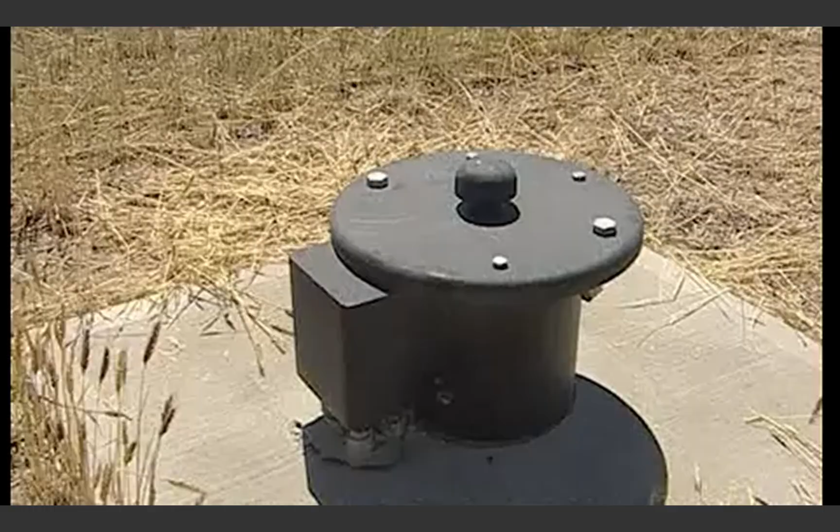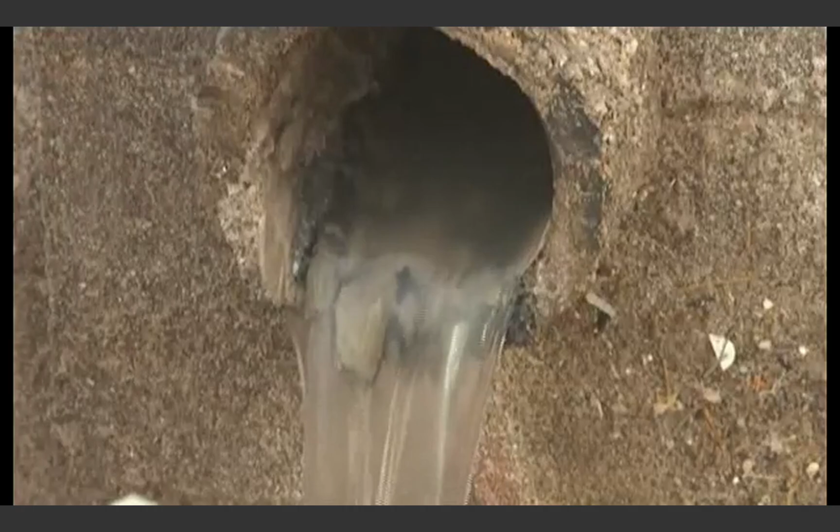Water. Water comes in many forms. Groundwater, surface water, drinking water, wastewater, stormwater, or dual use and reuse. Some may need greater treatment than others, depending where it is discharged or on how it is used. In the end, however, it is all water.

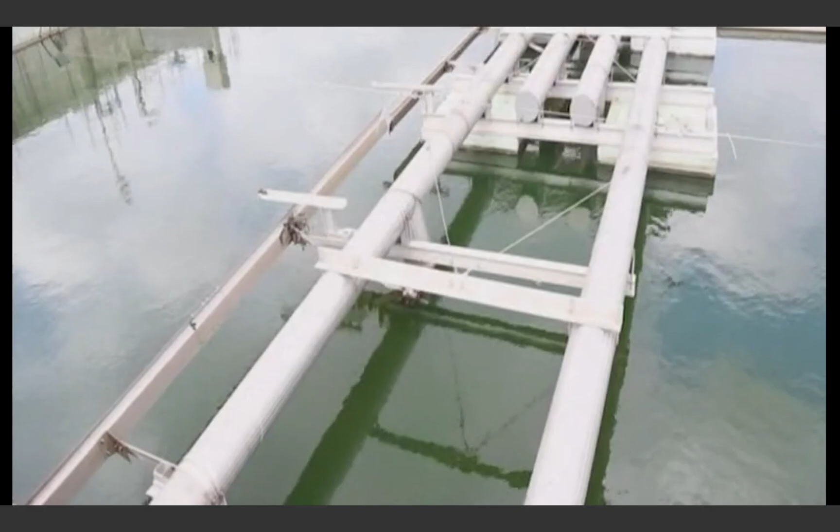This program is meant to be a general wastewater overview that will examine secondary treatment. Understand that no two treatment plants are identical, and that while there are variations between treatment methodologies and plant designs, usually because of the region or climate, the science and concepts remain the same.

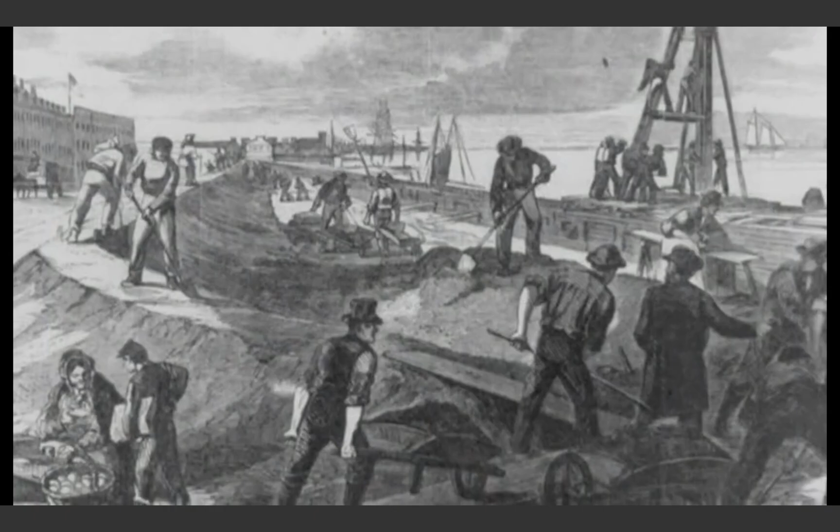It was not until the late 19th century that the beginnings of sewerage, infrastructure designed to convey sewage, was implemented in North America. Outbreaks of cholera, typhoid, and other waterborne diseases during these early years challenged scientists. The research of Louis Pasteur and Robert Koch provided the scientific proof for germ theory and the presence of waterborne disease. The knowledge of the impact of harmful organisms contained in sewage illuminated how inadequate disposal could harm human health.

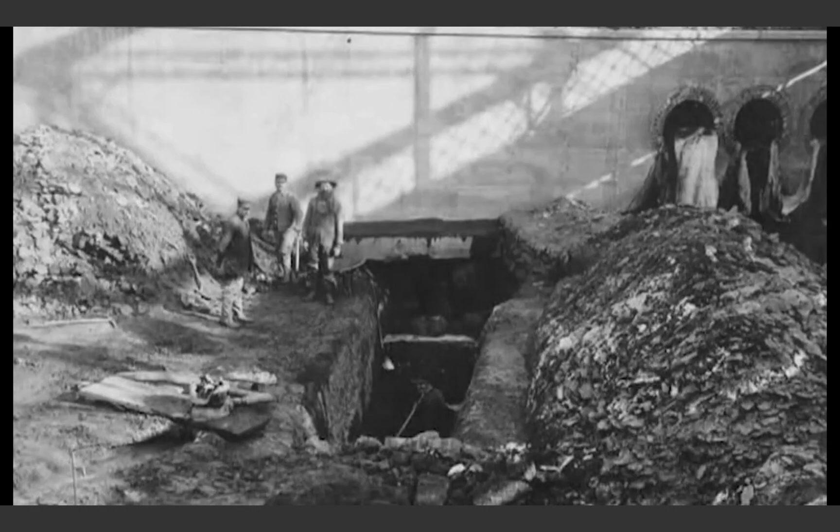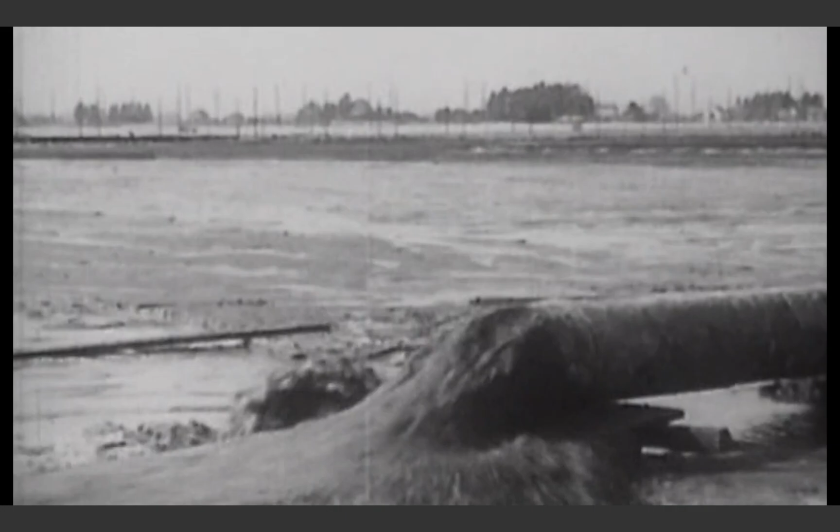Cities rallied to build collection systems to carry waste away, usually to the closest waterway. Policymakers and city engineers of the time believed that the flowing waters would purify the sewage. In 1899, the Rivers and Harbors Act was passed, but it would be years before meaningful follow-up legislation would arrive. As late as 1905, an astounding 95% of urban development used waterways for sewage disposal.

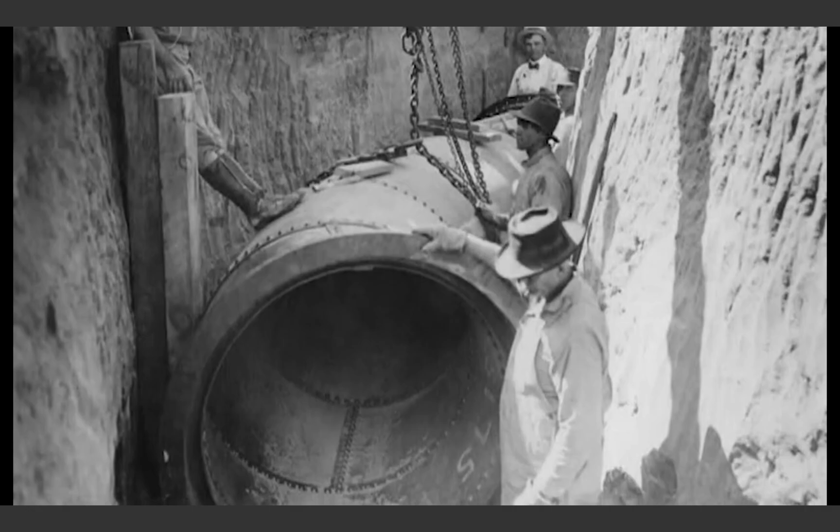Controversy started over water quality and how to best protect drinking water supplies. The debate centered on whether wastewater treatment or water treatment best served public health. And few cities could then afford to build both water and wastewater treatment facilities.

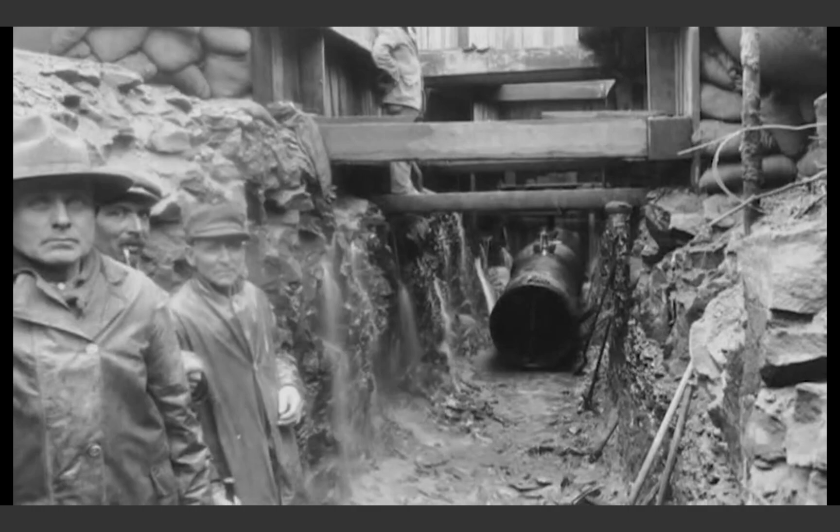In the early 20th century, public opinion, local legislation, and affordable wastewater technology shifted in favor of centralized wastewater treatment. Probably the most influential development supporting wastewater treatment was the demonstration of the cost-effective use of the activated sludge process to treat large volumes of wastewater.

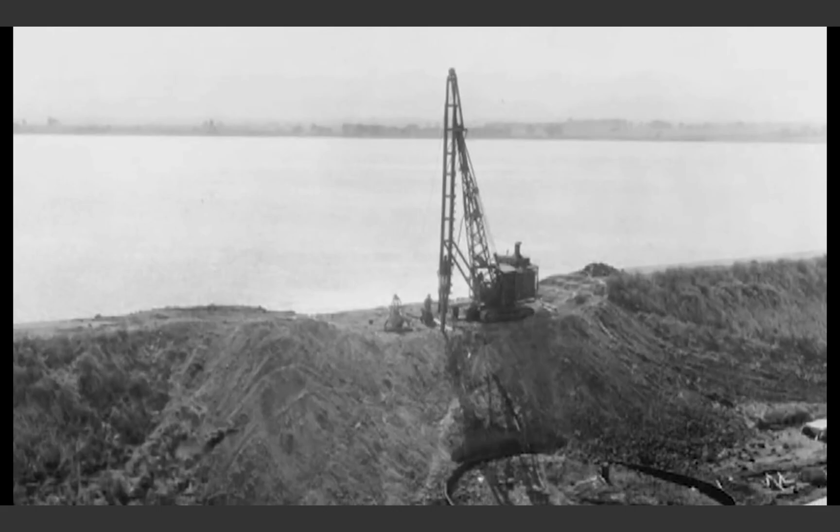Through the 1940s and 50s, cities struggled with urban industrialization, suburbanization, and unmitigated post-war expansion. The Water Pollution Control Act of 1948 provided needed enforcement and financial assistance to build collection and treatment facilities. This act was extended in 1952 and became permanent legislation in 1956.

In 1965, amendments to the Water Pollution Control Act strongly addressed the issue of protecting water quality. This is the first shift in the fundamental goal of wastewater treatment from public health to an added goal of water quality. Despite these efforts, U.S. waters were deteriorating, and in 1972 the federal government took a significant stance on water pollution and passed the Clean Water Act. The Clean Water Act was instrumental because it was a funded mandate distributing federal funds to states and municipalities.

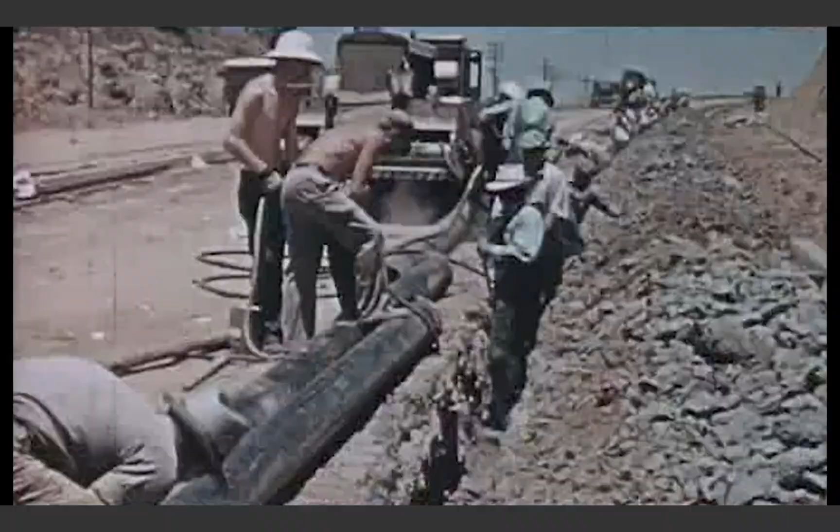The Clean Water Act established the basic structure for regulating pollutants discharged into the waters of the United States. This is known as the National Pollutant Discharge Elimination System, or NPDES. The NPDES permit program controls water pollution by regulating point sources, including wastewater treatment plants, which discharge pollutants into U.S. waters.

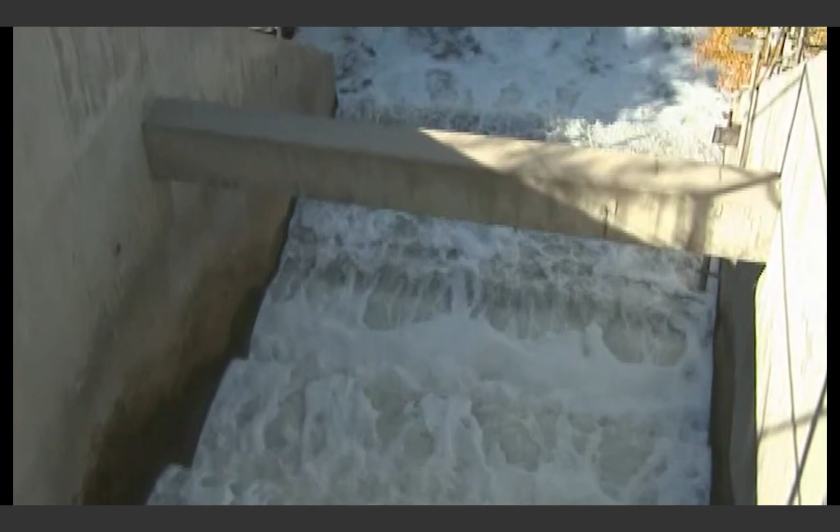Every wastewater treatment plant must obtain an NPDES discharge permit that establishes plant effluent water quality requirements, which ultimately define treatment strategies. Region, climate, finances, available footprint, and receiving water quality are a few considerations that can shape wastewater treatment decisions.

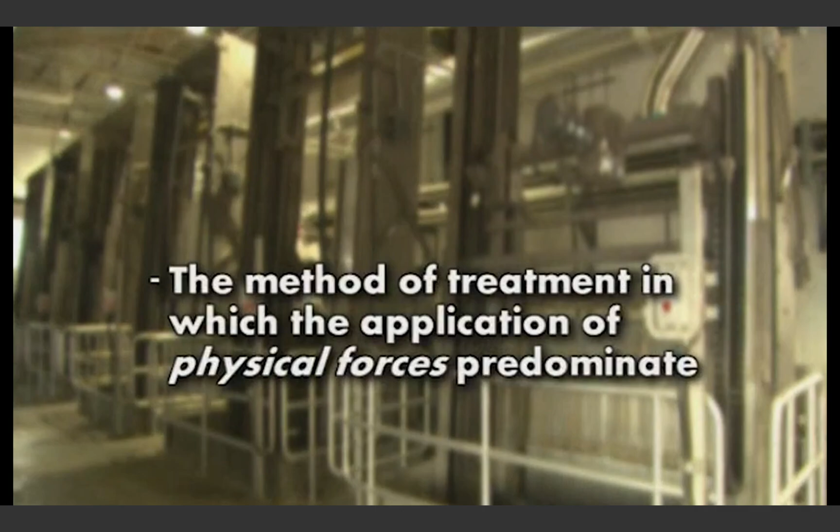The methodology for treating wastewater is well established and fairly unified. The method of treatment in which the application of physical forces predominate, such as mechanical separation using bar screens, is called a unit operation. The method of treatment in which the removal of contaminants is brought about by chemical or biological reactions, such as disinfection, is termed a unit process. Together, they provide the various levels of treatment known as preliminary, primary, secondary, and advanced or tertiary treatment.

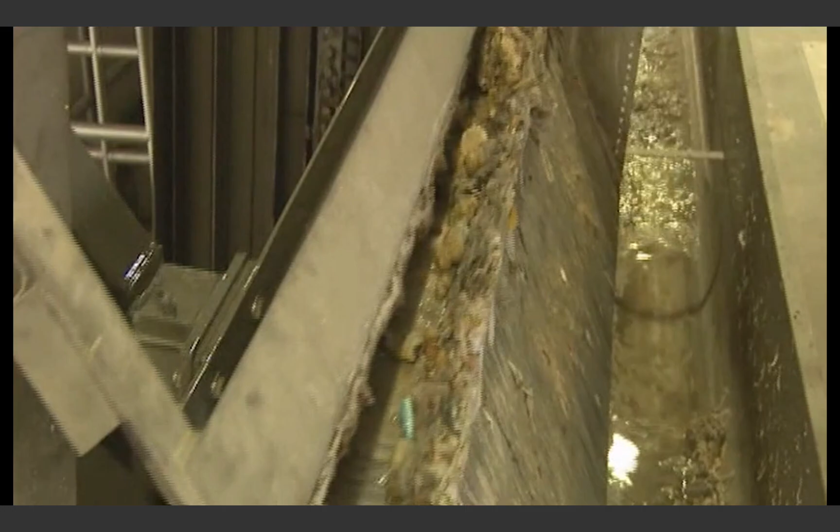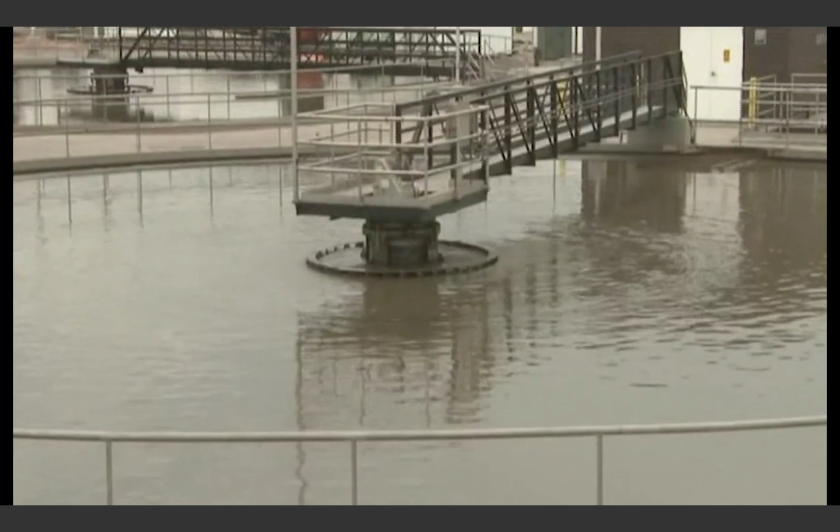In preliminary treatment, rags, sticks, floatables, and grease are mechanically separated from the flow. These objects can cause maintenance and/or operational problems downstream. In primary treatment, settleable solids and a portion of the organic matter they exert are typically removed through sedimentation. Secondary treatment provides removal of biodegradable organic matter and suspended solids.

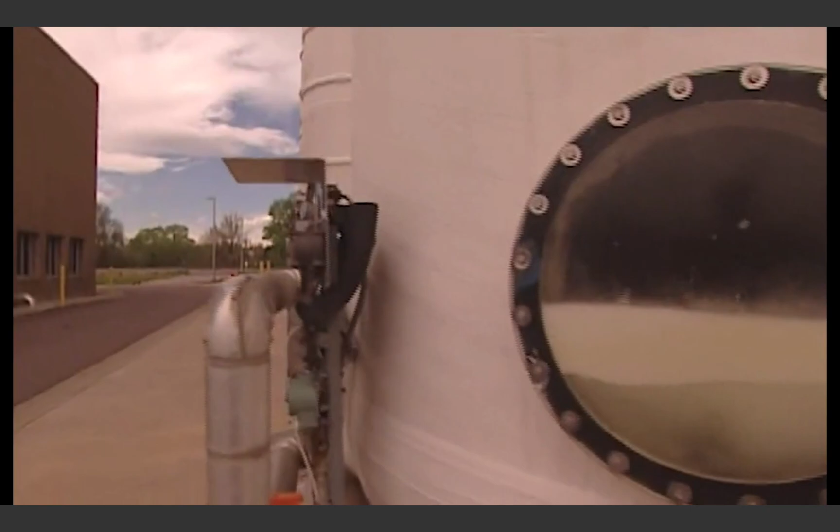In advanced treatment, additional combinations of unit operations and processes are used to remove residual suspended solids and other constituents that are not reduced significantly by conventional secondary treatment. This program focuses on the secondary or biological unit processes which are designed to remove the unseen pollutants.

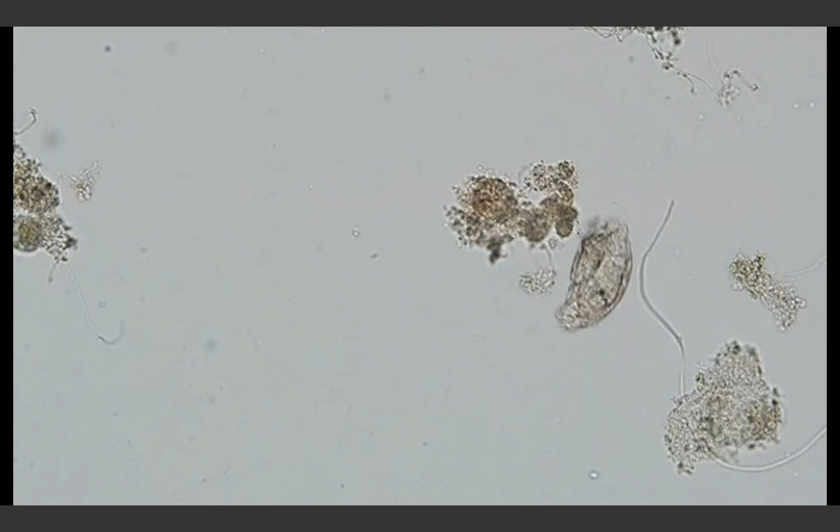Wastewater flowing out of the primary process still contains both floatable and dissolved solids. In nature, this organic mix would be considered a buffet for microorganisms and bacteria. The theory for the secondary treatment process is to create a highly controlled environment created specifically for these microorganisms to work as fast and efficiently as possible in breaking down the organic materials.

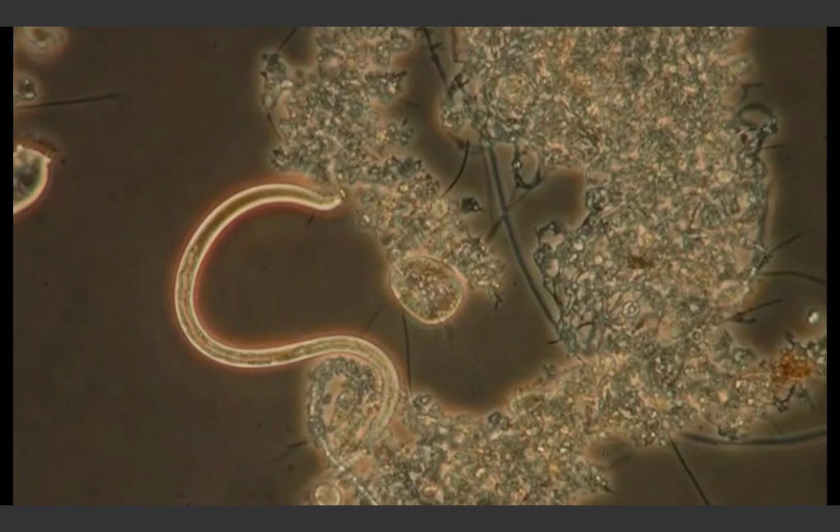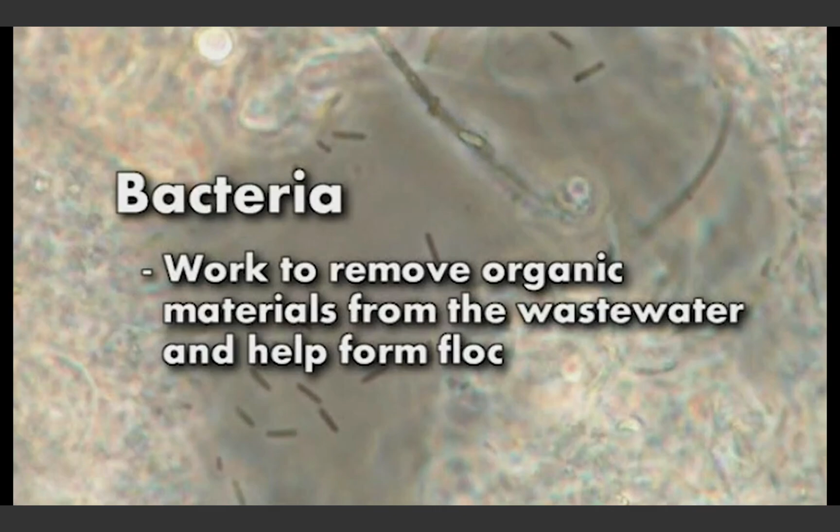In AWWA's Wastewater Microbiology, information is available to help understand the different types of bacteria, protozoa, and metazoa, including how to classify them and their roles in wastewater treatment. Bacteria are the most numerous and important microorganism since they work to remove organic materials from the wastewater and help form floc. Bacteria make up about 95% of microorganisms in activated sludge, followed by protozoa with about 3%.

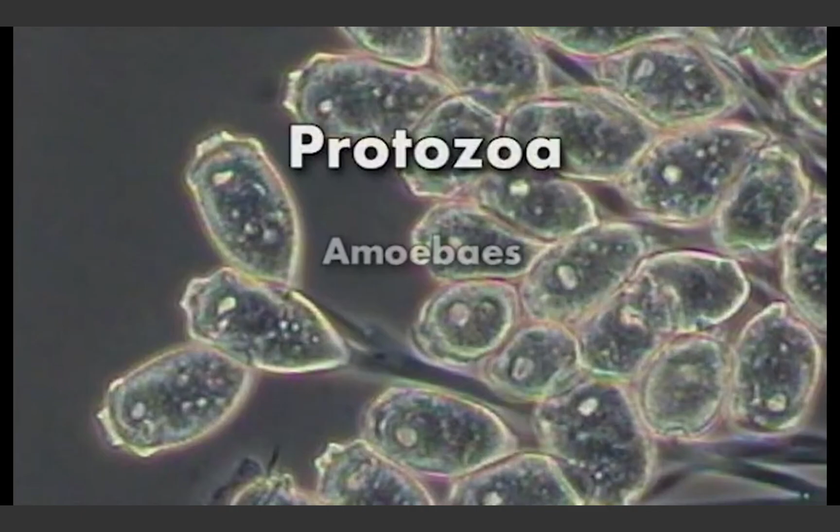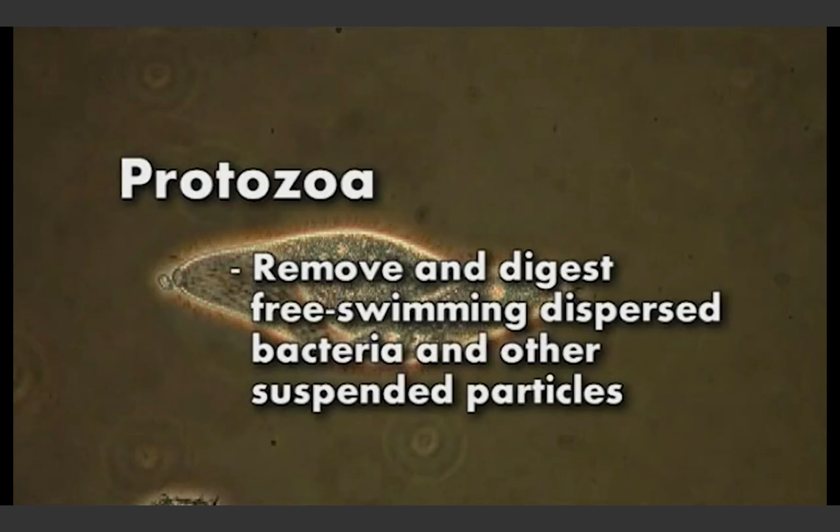Protozoa are grouped as amoebas, flagellates, and ciliates. Protozoa play a critical role in the treatment process by removing and digesting free-swimming dispersed bacteria and other suspended particles. This improves the clarity of the wastewater effluent.

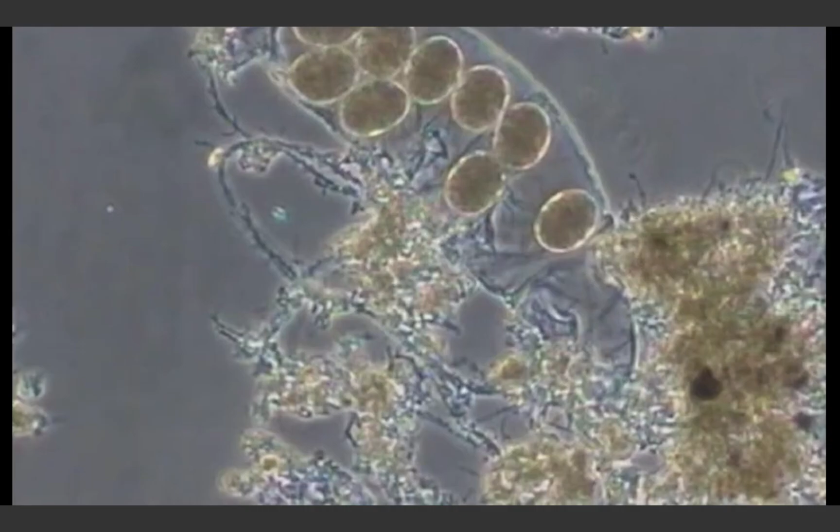Lastly, are metazoa, which are zoological multicellular organisms that include all animals except protozoa. This means all creatures from elephants down to rotifers. Rotifers are more complex organisms than protozoa. Rotifers clarify the effluent by removing leftover bacteria, algae, and smaller protozoa and help create floc.

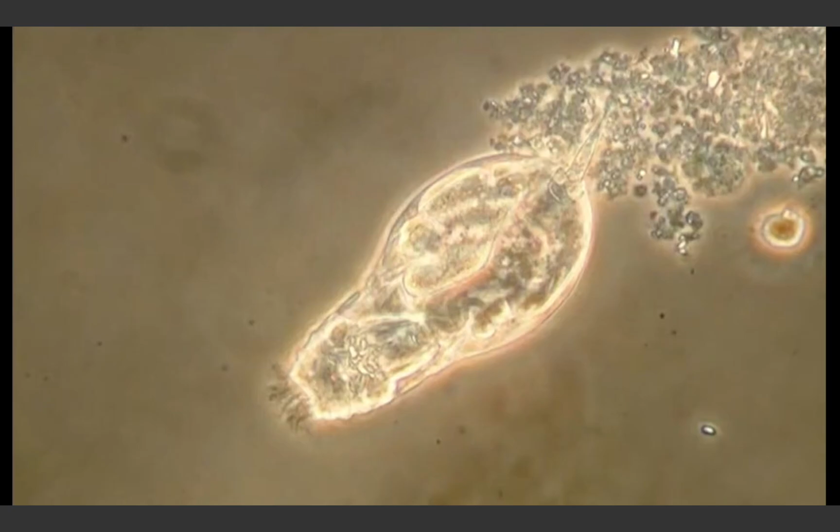Wastewater operators control oxygen levels, temperature, and detention time to support these microorganisms as they consume dissolved matter, converting it to suspended solids, which can be settled out in a secondary sedimentation basin.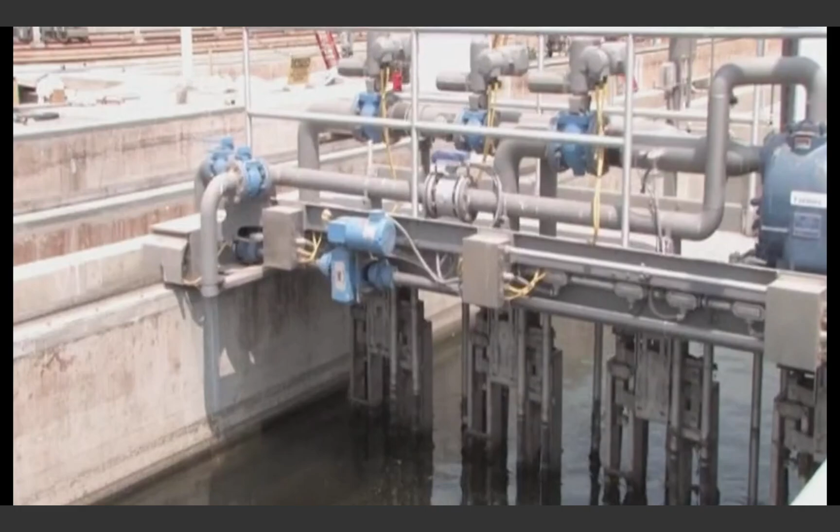One of the most common forms of the secondary treatment is the activated sludge process or the suspended growth activated sludge process. This usually is comprised of an aeration basin and the solid separation equipment, or a gravity sedimentation basin called the secondary clarifier. In this process, the incoming wastewater and microorganisms are suspended and mixed in a large basin and aerated for anywhere from a few hours to several days.

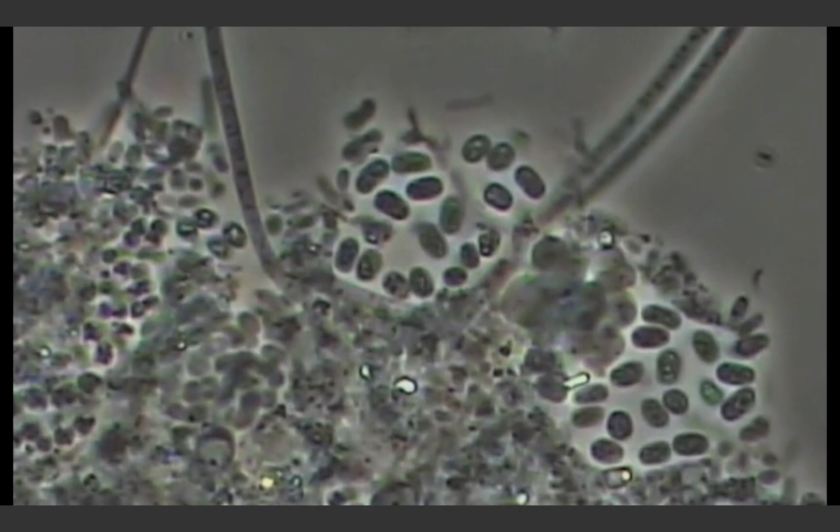Operating an activated sludge process is a complicated, continuous process because wastewater flows through the plant 24/7, and there needs to be enough hungry microorganisms to keep the process going. The activated sludge, or mixed liquor suspended solids, flows from the aerated basin to a sedimentation basin or clarifier to allow the suspended solids to settle, creating a sludge blanket. A portion of this sludge blanket is piped to the solids processing area for further treatment and is called waste-activated sludge.

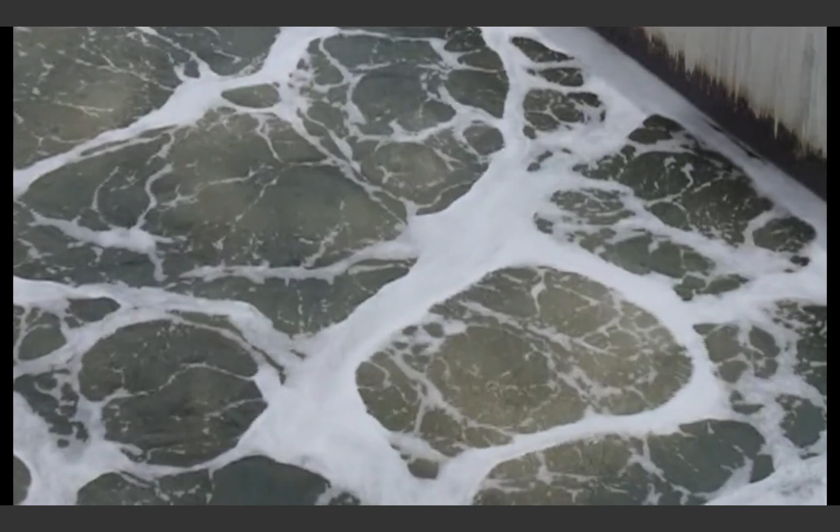There are many variations on the activated sludge process. Each variation is designed to address a specific issue or problem. Some modifications are characterized by differences in mixing and flow patterns in the aeration basin and in the manner in which the microorganisms are mixed with the incoming wastewater.

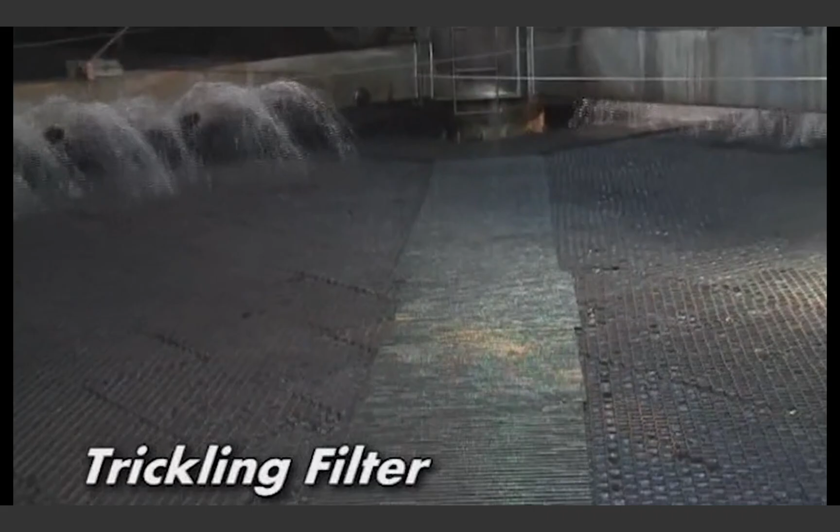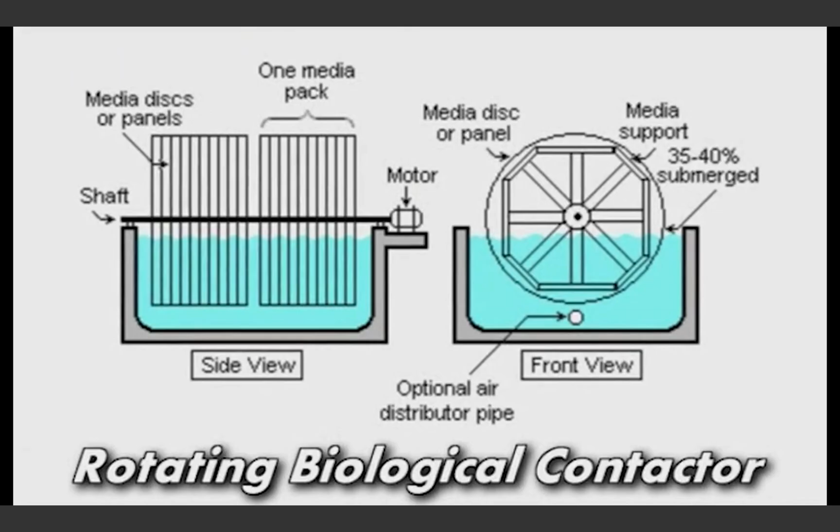Fixed growth activated sludge systems are designed to keep wastewater in contact with microbial growths attached to surfaces of supporting media. Types of fixed growth systems include trickling filters, where wastewater is distributed over a bed of media, a biological tower where wastewater is distributed over 14 to 20 feet of synthetic media, or a rotating biological contactor, where a series of circular plates on a common shaft are slowly rotated while partially submerged in wastewater.

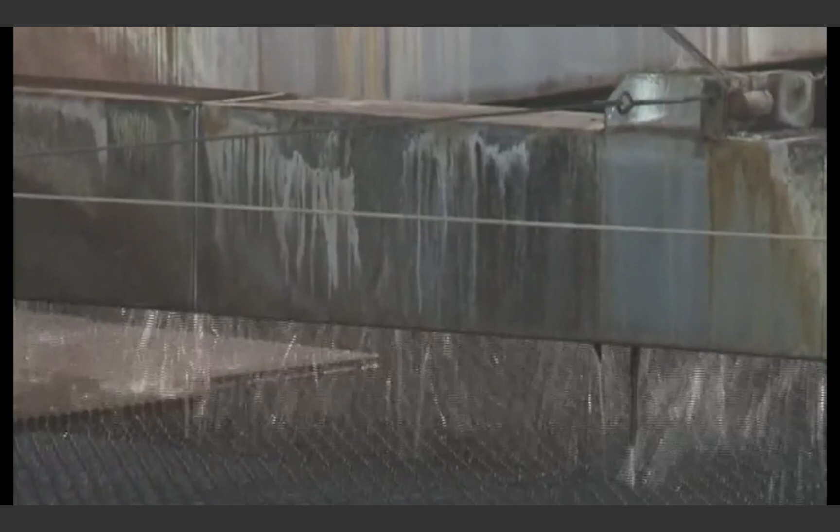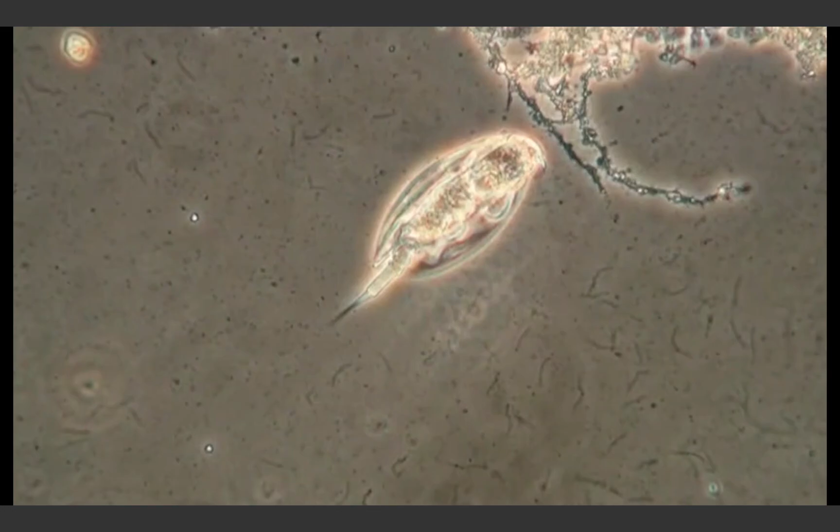Although the physical structures differ, the biological process is the same in all of these fixed growth systems. Wastewater is distributed over the fixed media, producing a biological slime that coats the surface. These biological slimes include bacteria, protozoa, fungi, and other living organisms that coat the surface of the fixed growth systems and feed on organic wastes. Organisms attached to the media in the upper layer grow quickly, feeding on the food supply.

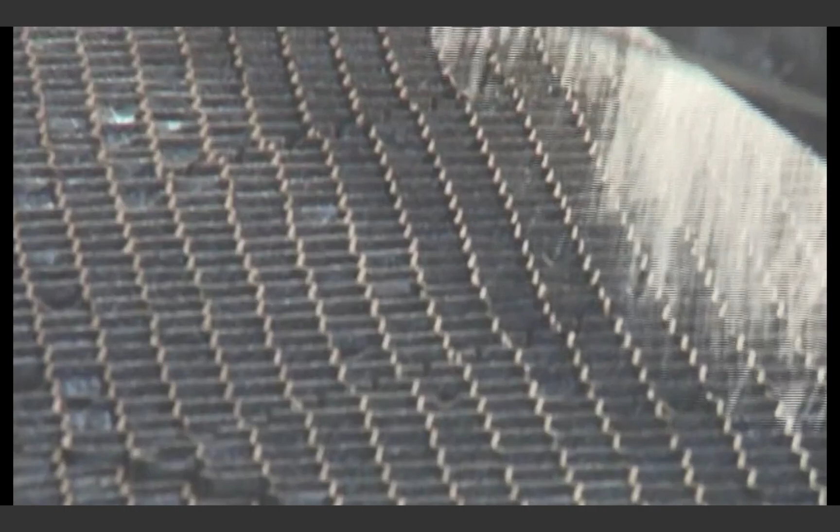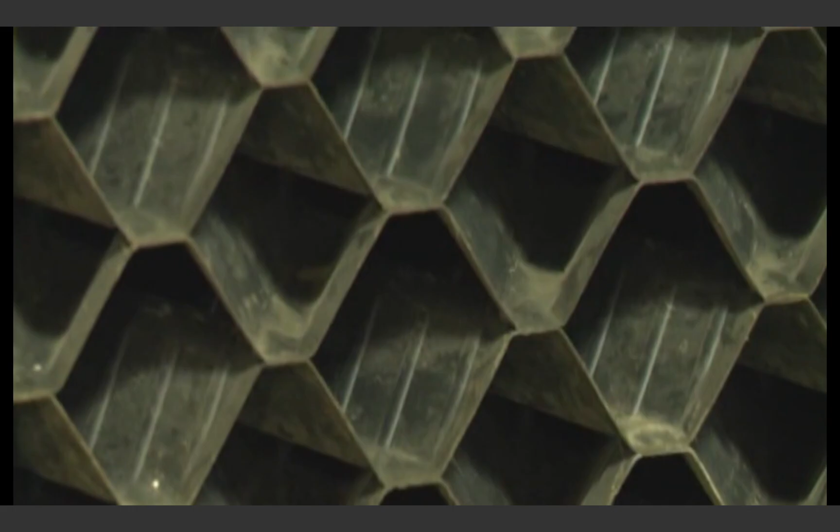One of the most commonly used fixed growth systems is a trickling filter. The filter serves a dual purpose of filtering the wastewater and supporting biological growth that feed on the waste materials. Physically, the trickling filter looks like a circular basin filled with natural rock or slag or synthetic materials that are usually 2 to 5 inches in diameter, since very small filter materials tend to slow and impede the flow of water and air. Positioned above the bed is a lateral or rotary, moving wastewater distributing arm. This arm distributes the wastewater as evenly as possible over the trickling bed.

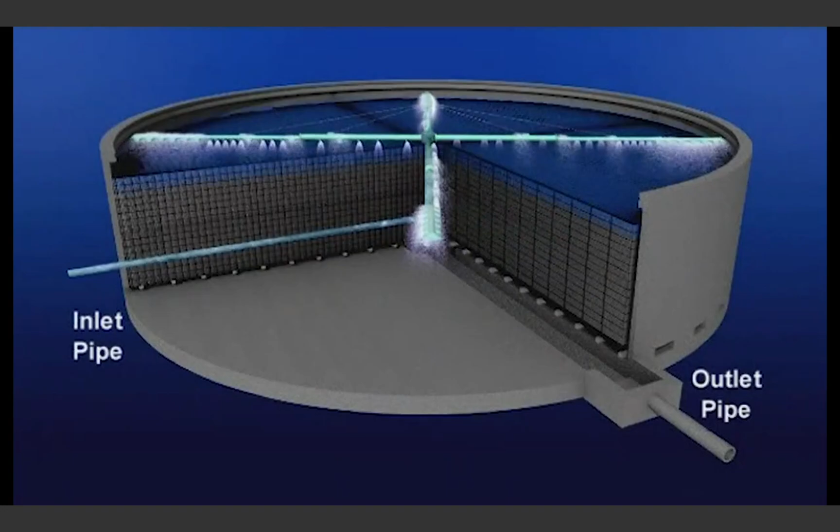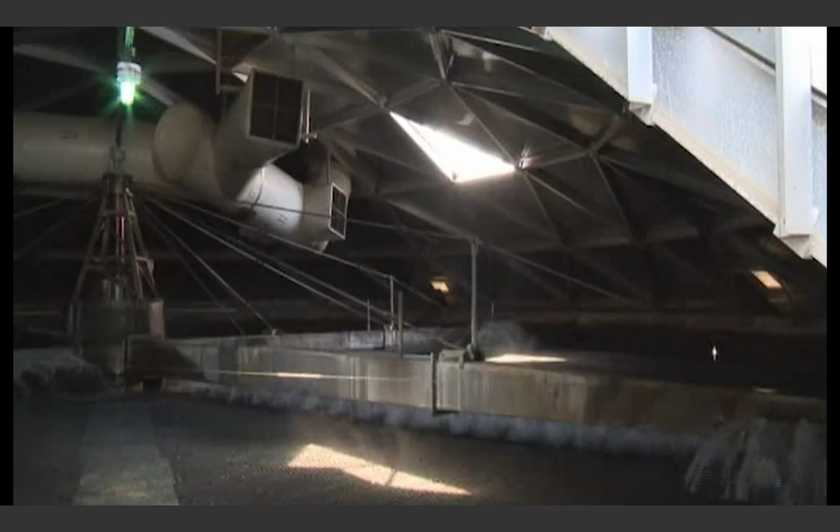As the wastewater trickles downward, the organic content decreases to the point where microorganisms toward the bottom layer are starving. Biological filtration is commonly referred to as aerobic treatment, but it is in fact a facultative system incorporating both aerobic and anaerobic activity. Excess microbial growth sloughs off the media and is removed in the secondary clarifier. Unseen below the filter medium are the underdrains that connect the returning liquids to the effluent channels.

Biological oxygen demand must be taken into account since the agents of change are biological in nature. The BOD load on a trickling filter is calculated by using the BOD in the primary effluent applied to the filter, not including the recirculated flow.

Here are some of the basics an operator needs to know about biological oxygen demand hydraulic loading. BOD loading equals the settled wastewater BOD divided by the volume of the filter media, where the BOD loading equals the pounds of BOD applied per 1,000 cubic feet per day. Settled BOD equals the wastewater BOD remaining after primary sedimentation in pounds per day. The volume of media equals the volume of the stone in the filters in thousands of cubic feet or cubic meters, as the case may be.

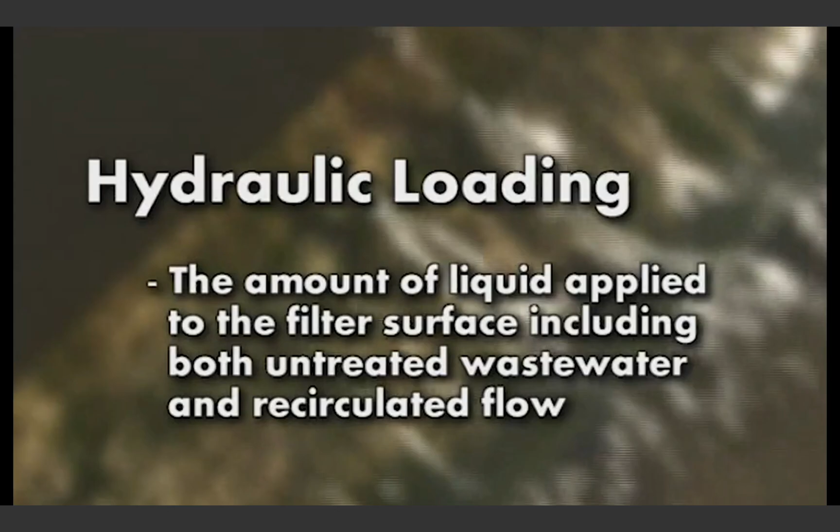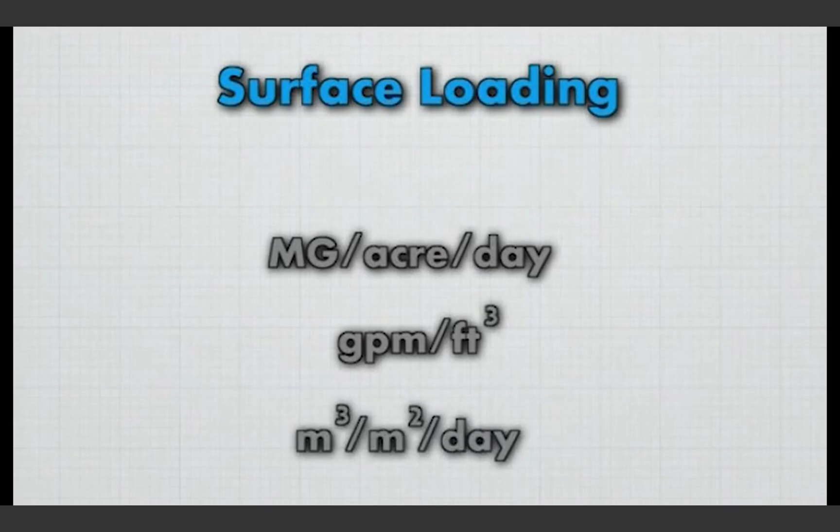Hydraulic loading is the amount of liquid applied to the filter surface, including both untreated wastewater and recirculated flow. Surface loading is commonly expressed in units of millions of gallons per acre per day or gallons per minute per cubic feet. This can also be expressed in cubic meters per square meter per day.

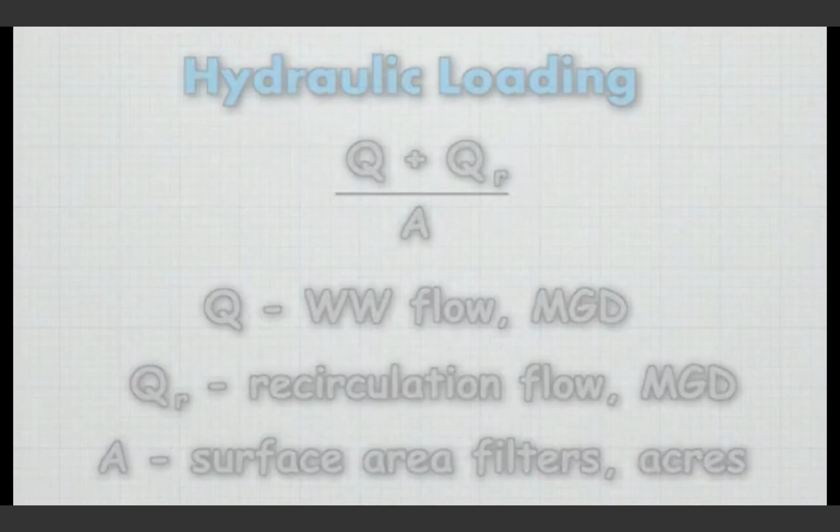Hydraulic loading is represented as the following equation, where Q equals the wastewater flow, QR equals the recirculation flow, and A equals the surface area of the filters in acres. Recirculation ratio is computed as follows. QR equals the recirculation flow, and Q equals the wastewater flow.

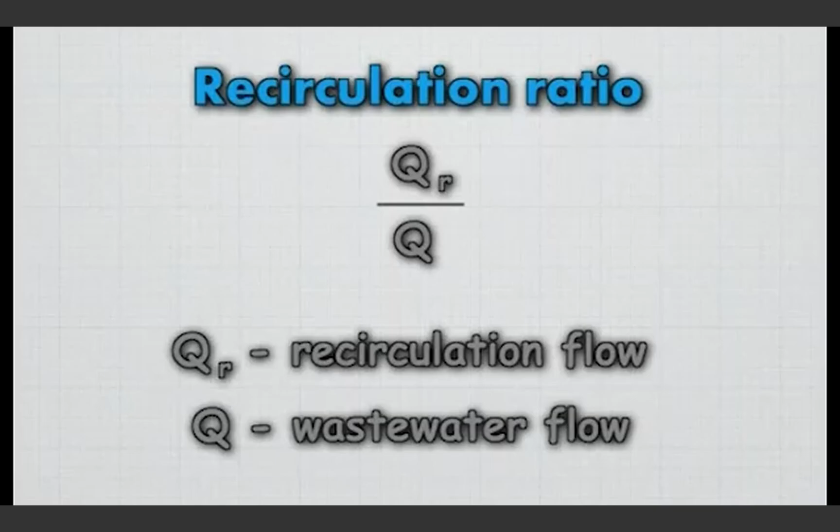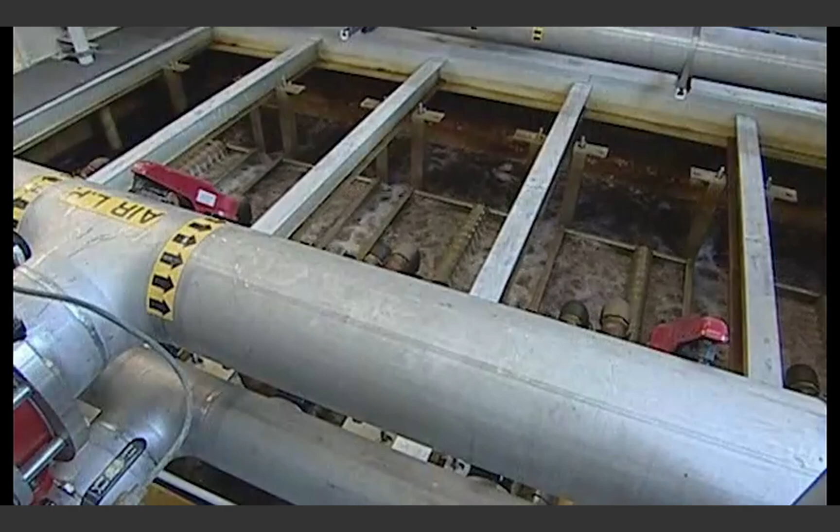Membrane bioreactors, or MBRs, are another activated sludge process which draws wastewater through a membrane filter, leaving the solids in the tank and allowing the clean water to flow through. The membranes replace the function of both clarification and filtration.

Some communities use aerated basins or lagoons for secondary treatment. These stabilization ponds use algae growth, sunlight, and oxygen to break down the organics in wastewater. Since this reaction is relatively slow, these ponds are typically aerated to speed up the process. These installations are typical in small systems.

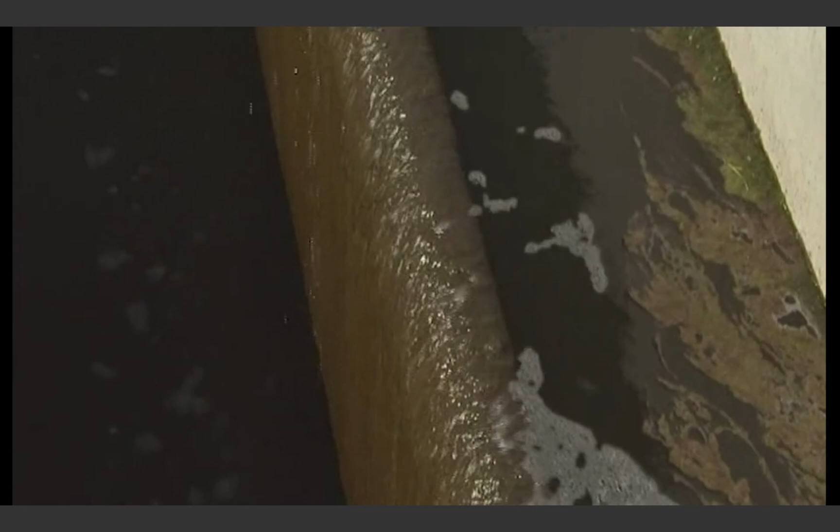Tertiary treatment is used to further improve the water quality prior to discharge. These systems may be designed to remove specific substances like metals, but are typically designed to further remove solids and nutrients. Large quantities of nutrients harm aquatic environments by stimulating algae growth and other vegetation that deplete the much-needed dissolved oxygen required by fish and other aquatic life.

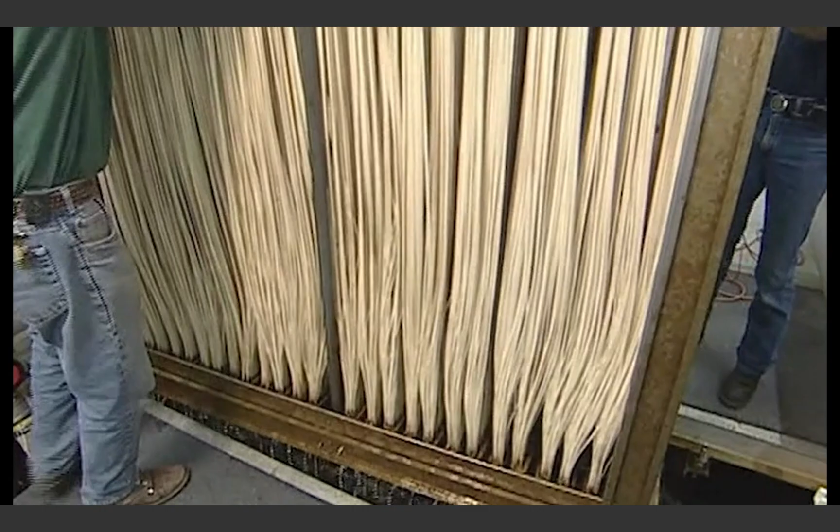The two primary nutrients removed in tertiary treatment are phosphorus and nitrogen. Phosphorus can be removed physically with membrane filtration, or chemically through precipitation using aluminum, calcium, or iron-based coagulants. Phosphorus can also be removed through biological phosphorus removal. Although chemical precipitation is more predominant, BPR is gaining popularity because it can remove phosphorus to lower levels at relatively manageable costs.

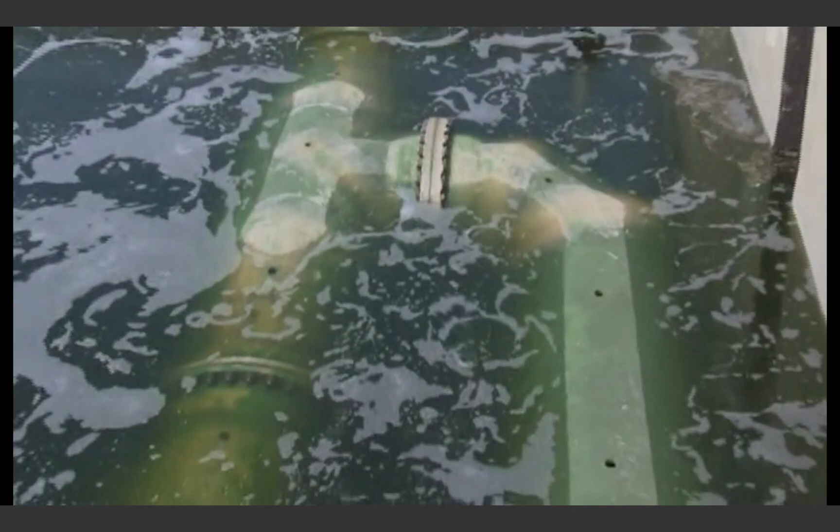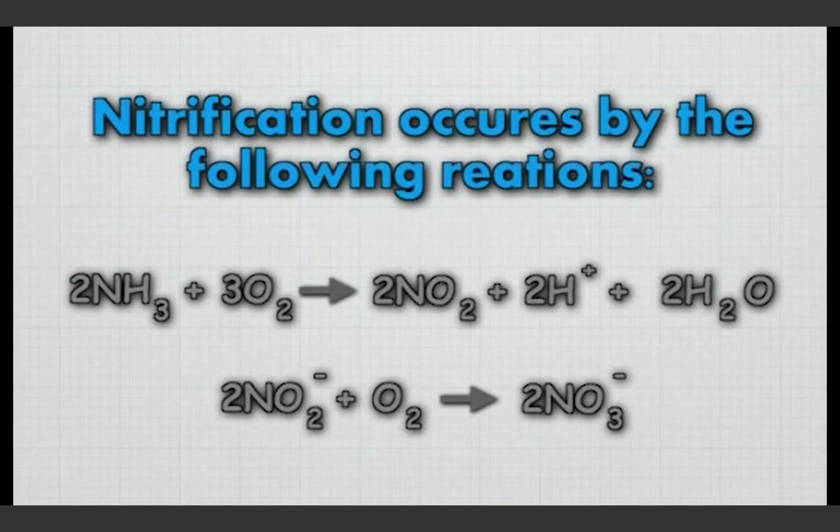En route to the treatment plant, much of the nitrogen contained in the raw wastewater gets converted from organic nitrogen to ammonia. In the plant, this ammonia is then converted to nitrate using a process known as nitrification. Nitrification employs special bacteria to convert ammonia to nitrate compounds, which are a less harmful form of nitrogen.

On the discharge side, some receiving waters are so sensitive to nitrogen compounds that the remaining nitrogen must be removed through a process called denitrification. Denitrification further converts the nitrogen in nitrates to nitrogen gas, which is vented to the atmosphere.

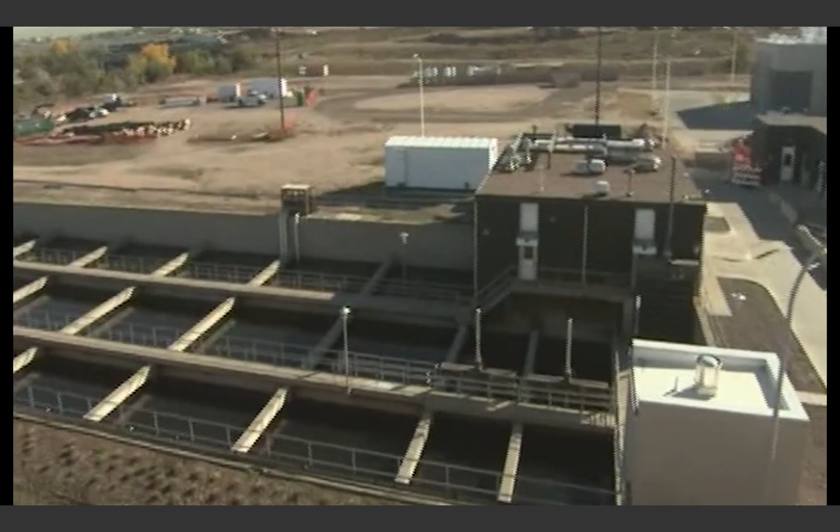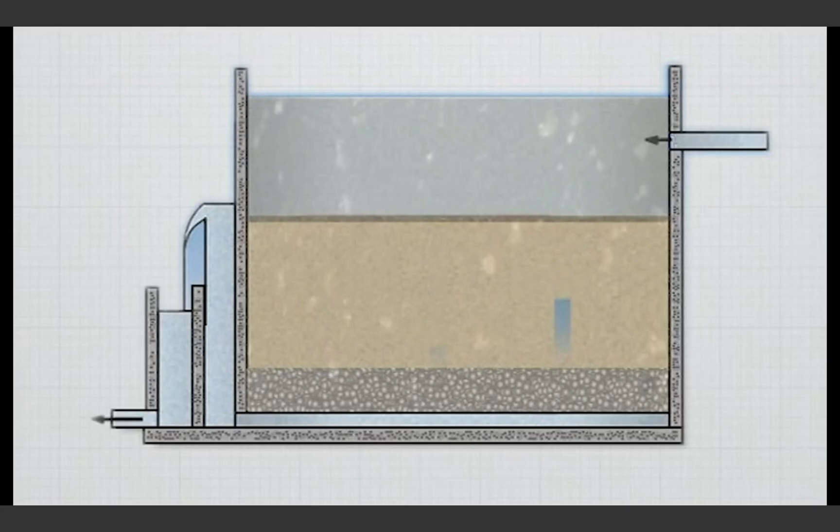Eventually, these filters will become clogged with solids, and backwashing or reversing the wastewater flow is necessary. The removed solids are then sent back through the treatment plant for further processing. In the instance where a very high-quality effluent is desired or required, membrane filters can be used in place of granular filters.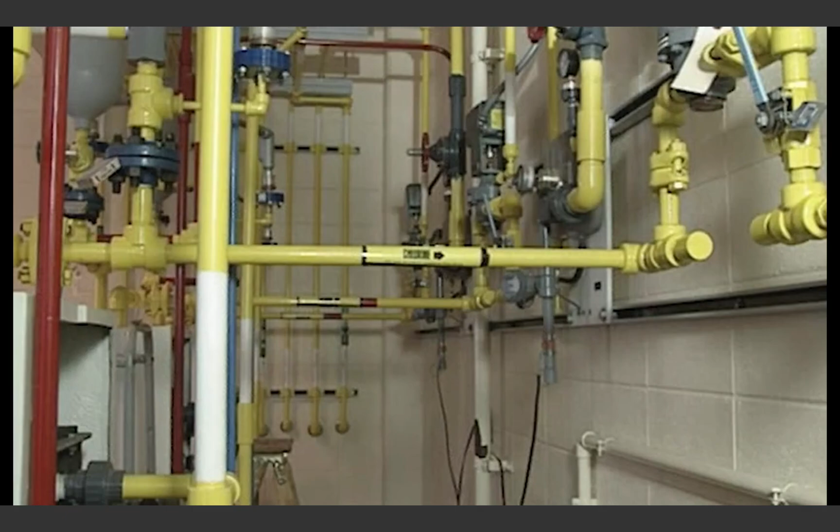The purpose of disinfection is the destruction or inactivation of pathogenic bacteria and/or viruses before the water is discharged into the environment. Traditionally, chlorine has been widely used as a disinfectant because of its ability to destroy target organisms. Chlorine can be applied in many forms, including chlorine gas and hypochlorite solutions. The required degree of disinfection is achieved by varying the chemical dose and the contact time. Chlorine dosage will vary based on chlorine demand, the wastewater characteristics, and discharge requirements.

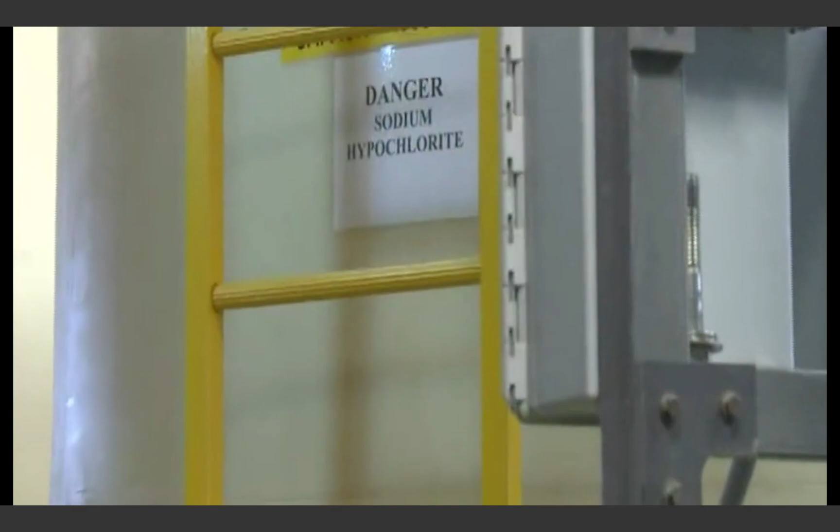Alternative treatment methods are gaining popularity as treatment needs, security considerations, and affordability converge. Sodium hypochlorite solutions, ozone disinfection, and ultraviolet technologies are becoming more widespread. Following disinfection, chlorine residuals can exist for many hours. To meet receiving water quality objectives, chlorinated wastewater effluent is often dechlorinated before being discharged into the environment.

Dechlorination is the process of removing the free and combined chlorine residuals to reduce residual toxicity after chlorination and before discharge. Dechlorination can be accomplished by the addition of sulfur dioxide or sodium bisulfite or sodium metabisulfite. Activated carbon can also be used. The total chlorine residual is reduced to a level that is not toxic to aquatic life. Aeration of the dechlorinated water is usually low-tech via a ladder step or a constructed waterfall arrangement that adds needed dissolved oxygen to support the aquatic environment.

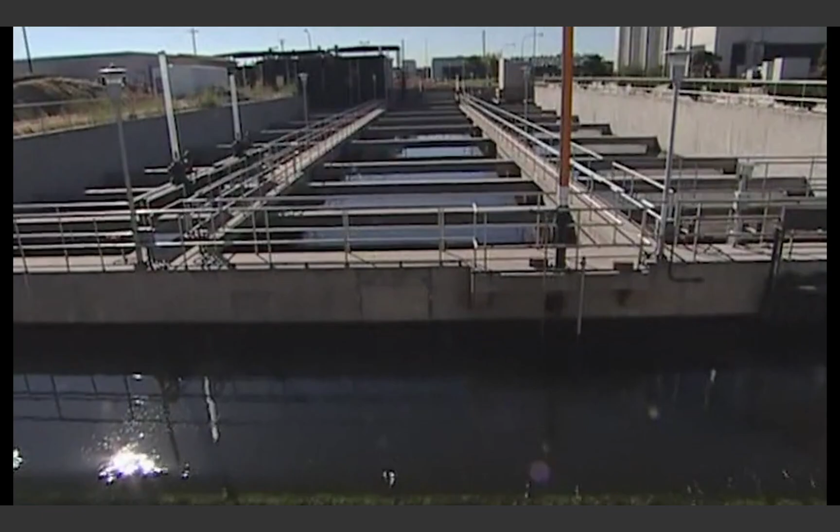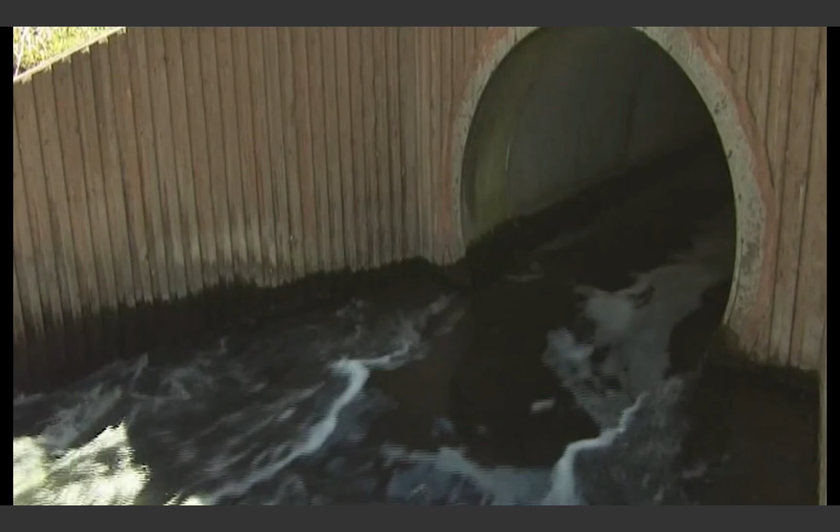As our ability to scientifically test and examine contaminants expands, new pollutants including heavy metals and synthetic chemical compounds will be discovered and eventually need to be treated or removed. The solution may be partially internal to wastewater treatment and/or external, requiring preliminary treatment at the industrial site. Looking forward, there is much to be considered when it comes to solutions for total water treatment. To return more usable water to receiving lakes and streams, new methods for removing pollutants are being developed.

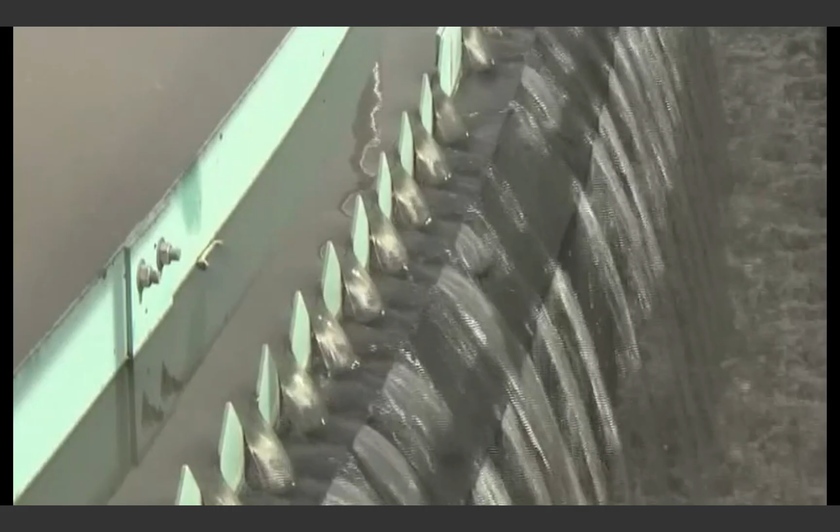Advanced waste treatment techniques in use or under development range from biological treatment capable of removing nitrogen and phosphorus to physical-chemical separation techniques such as filtration, carbon adsorption, distillation, and reverse osmosis. These wastewater treatment processes, alone or in combination, can achieve almost any degree of pollution control desired. Waste effluents purified by such treatment can be used for industrial, agricultural, or recreational purposes, or even drinking water supplies.

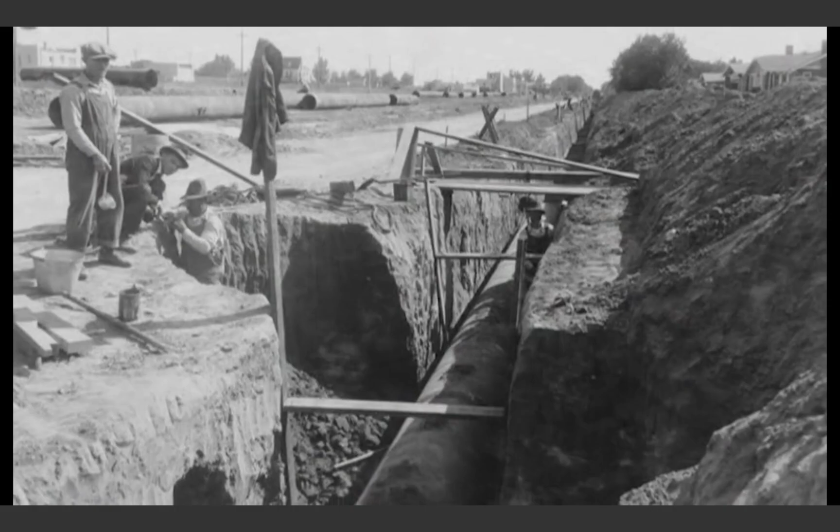Since the beginning of urbanization, the organic precursor to civilization, health has been predicated on safe drinking water and adequate wastewater disposal. The rise of megacities is directly attributable to the important work wastewater operators and engineers do every day, protecting public health through robust wastewater collection and treatment systems.

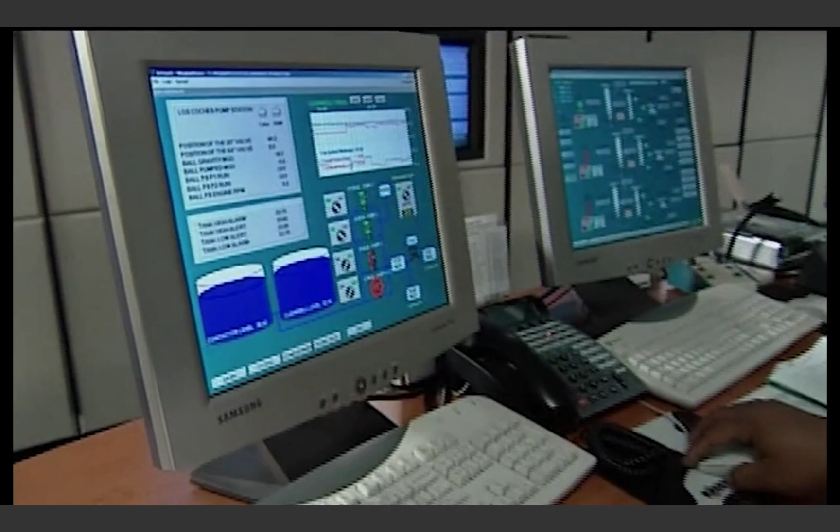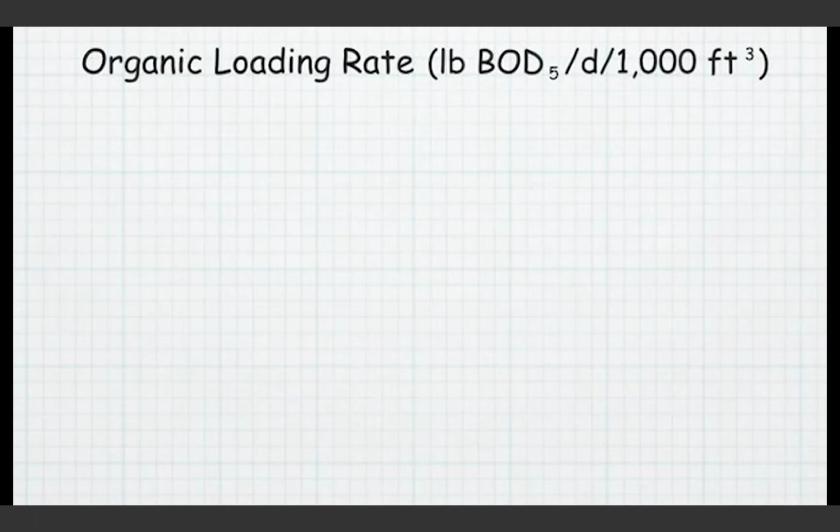The following section is a review of math techniques that can be beneficial to wastewater treatment operators when working with trickling filters. Here's the question. What is the organic loading rate in pounds BOD5 per day per 1,000 feet cubed for a trickling filter that is 151 feet in diameter and 5.10 feet deep if the primary effluent flow is 1,220 gallons per minute and the BOD5 is 207 milligrams per liter?

First, determine the volume of the trickling filter in feet using this equation. Volume in feet cubed equals 0.785 times the diameter squared times the depth of the tank in feet. Plugging in the numbers, we get volume in feet cubed equals 0.785 times 151 feet squared times 5.1 feet, which equals 91,283.8 feet cubed. Next, factor out 1,000 feet cubed from the volume, or 91.2838 times 1,000 feet cubed.

Next, convert the gallons per minute to million gallons daily. Number of million gallons daily equals 1,220 gallons per minute times 1,440 minutes in a day, divided by 1 million, which will equal 1.7568 million gallons daily. Next, determine the pounds of BOD5 per day per 1,000 feet cubed using a modified version of the pounds equation.

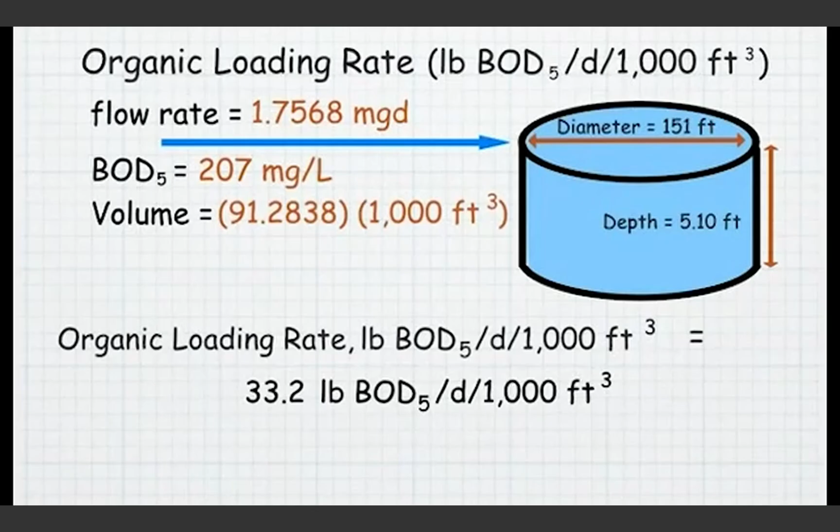The organic loading rate in pounds of BOD5 daily per 1,000 feet cubed equals 207 milligrams per liter of BOD5 times 1.7568 million gallons daily times 8.34 pounds per gallon divided by 91.2838 times 1,000 feet cubed. So the organic loading rate in pounds of BOD5 daily per 1,000 feet cubed equals 33.225, rounded to 33.2 pounds of BOD5 daily per 1,000 feet cubed.

Communities with good wastewater systems are communities that can continue to expand and grow by protecting public health through robust wastewater collection and treatment systems.